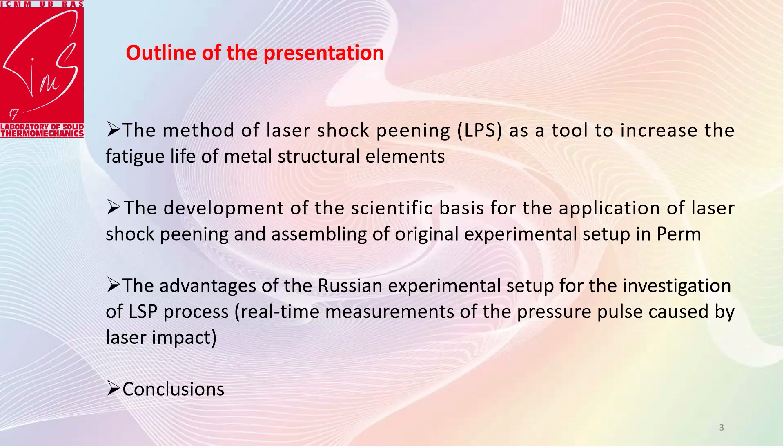Okay, the next slide is laser shock peening. I will show a movie. It's not our movie, but you can get an idea of what's going on. The idea is quite simple. You have a very strong and very short laser pulse. The power density is quite high, about 90 gigawatts per centimeter squared, and you immediately evaporate the material.

Due to evaporation, you generate a shock wave, an elastoplastic wave, a very specific shock wave with very high amplitude and very short duration. Short duration is quite important. The physical mechanisms behind the plastic deformation are quite unusual. This stress wave propagates in the sample, and you are able to create compressive residual stress at a depth of up to 1 to 2 millimeters.

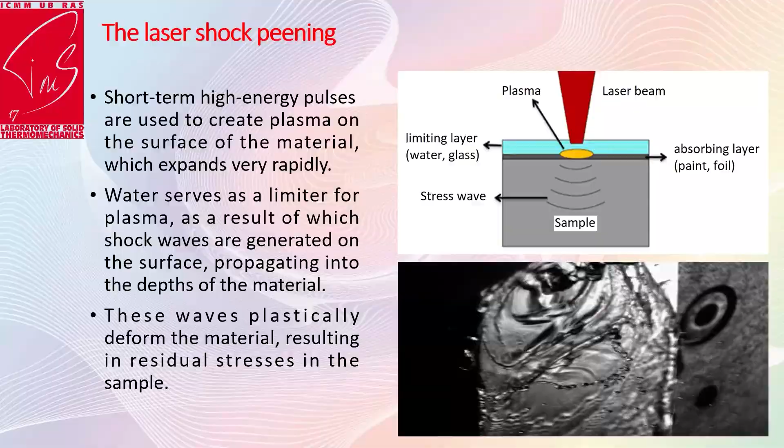The value of this stress is up to -1 gigapascal. So it's incredibly high residual stress, and practically you can stop cracks and initial defects, and as a consequence, you can increase the fatigue life. You can read the ideas of this technique and see what's going on. We have a water layer and a laser pulse, and after that, plastic deformation. So it's a very funny story.

About 3 years ago, I started to work in laser shock peening. I have very good friends in Germany. They developed this technique for Airbus, and they told me, you're working with fatigue cracks, there is a very good technique to drive the fatigue crack propagation, could you try? And he showed laser shock peening. It's a result from his colleagues from Germany.

You can see the standard samples. Blue square is the area of treatment, and red line is fatigue crack propagation in the initial case. And if you apply different regimes of laser shock peening, you can see the slowdown of fatigue crack propagation. Yeah, it's quite expected, and you have a technique to manage, to drive the fatigue crack propagation. And practically, if you have a crack, you can stop it, or you can prevent crack initiation.

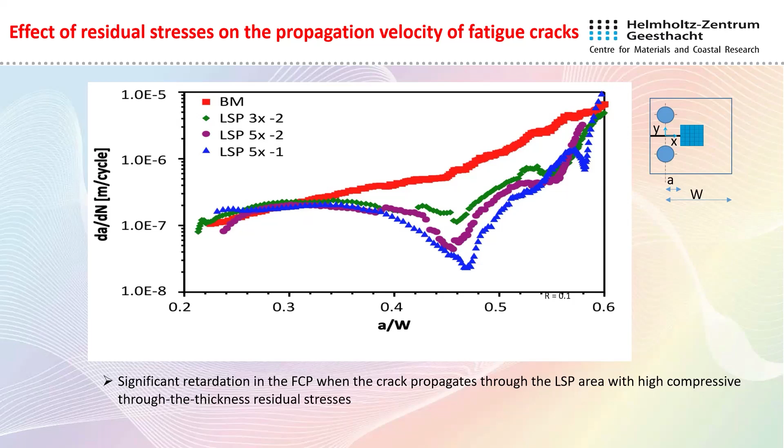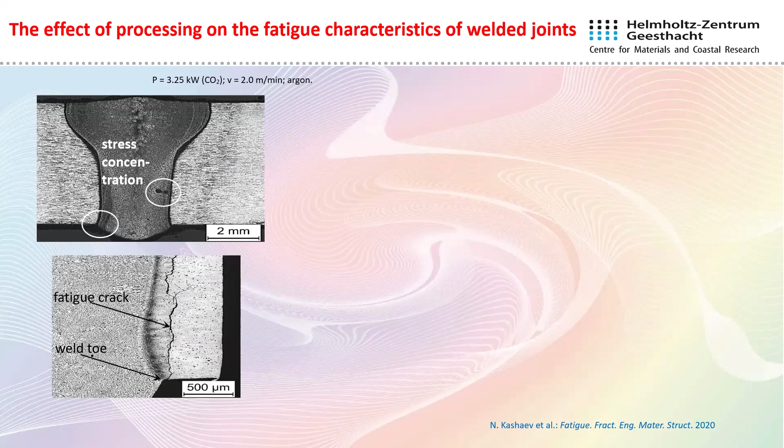Next slide was absolutely magic for me. When German colleagues showed me, it was absolutely fantastic. It's weld joints, and cracks with weld joints, and you can see the standard Wöhler curve for these samples. If you have a crack, of course, the fatigue life decreases. It's expected. But if you take samples with a crack and treat them, the fatigue life increases, and it's possible that a cracked sample becomes better than the initial sample. It's absolutely fantastic.

So after, I said, okay, we should develop this technique. There are at least 2 teams which work in the United States, even in Germany, and we cannot find this setup, this equipment in the Russian Federation. It was about 3 years ago. We started to work, and we developed. We're not going to buy this setup. We developed this setup in Russia using help of our Chinese colleagues. We bought the laser, robots and so on.

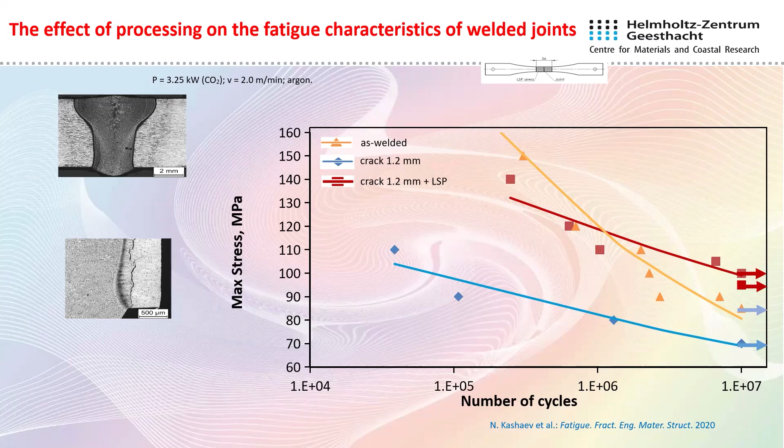And together with German colleagues, there was a collaboration agreement which was signed, I guess, in 2020. But in 2022, it was completely forbidden for German colleagues, even personal contacts with Russians. But in this case, we finished this setup and we started work, and it's really a pity, but we are waiting to start this collaboration again.

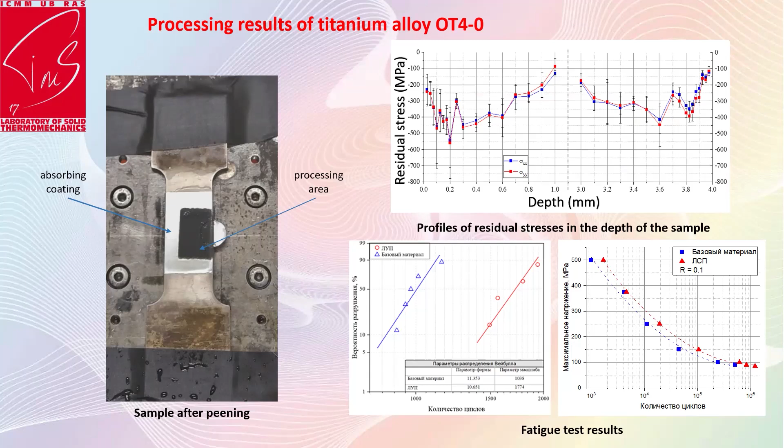So the preliminary result: we sent our colleague, Lena, to Germany, and it's quite simple experiments with titanium OT4-0. It's Russian titanium. I don't know exactly the equivalent alloy abroad, but you can see residual stress, 1 millimeter from each side, up to 500 megapascal, and it's good both for low cycle fatigue and for high cycle fatigue. And we decided to start this work in Russia.

Now we have an experimental setup. We can treat practically any shape of the samples, any materials. The power density in this setup is bigger than the setup of the United States. And if you are reading about this technique, it's really a magic wand. You can increase hardness, corrosion resistance, fatigue life, wear resistance, durability. You can heal fatigue cracks. You can do all what you want. It's absolutely fantastic, but it's not true, of course. Yeah, too good to be true, exactly.

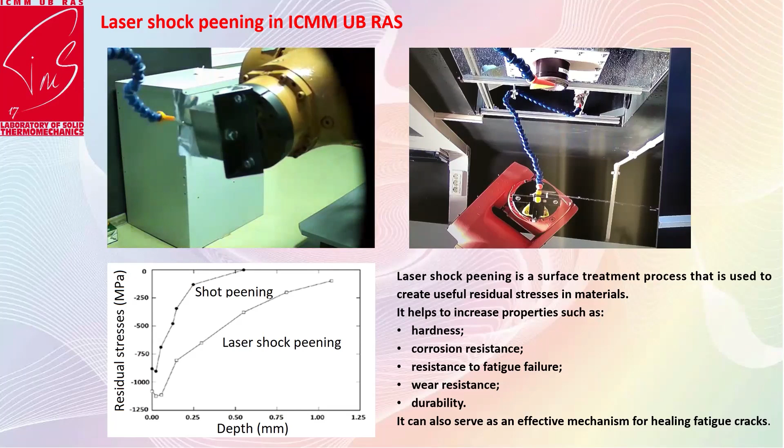But if you compare shot peening, the standard technique which was used in our industry, and laser shock peening, you can see easily it's bigger and deeper. But there is at least one problem. If you have such a technique, all in all, you have a balance. If you create compressive residual stress in one place, you create positive residual stress in another place. It could be inside of a sample, it could be on the sample surface. And it's really a big problem. And I have only a few minutes. I'll just show you what we are doing.

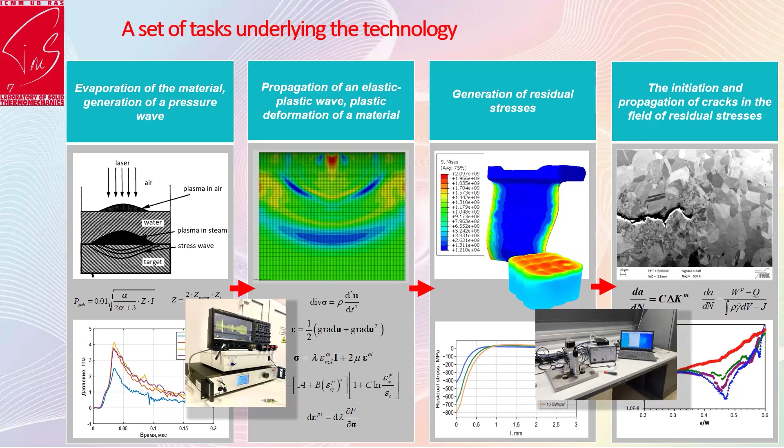Our advantage, we have 2 additional experimental setups in our lab. We have VISAR or photonic Doppler interferometry to measure the real pulse, and we can measure the residual stress. So I'm not going into detail, I'll just go to the final slide, and you can see the result. It's 3 kinds of samples, 3 different titanium alloys. For example, in this, you can increase the intensity two times. But what I want to show, if you find the good position of treatment, for example, this sample with stress concentrator, we have tested 5 different regimes of treatment. We can increase fatigue life 7-8 times.

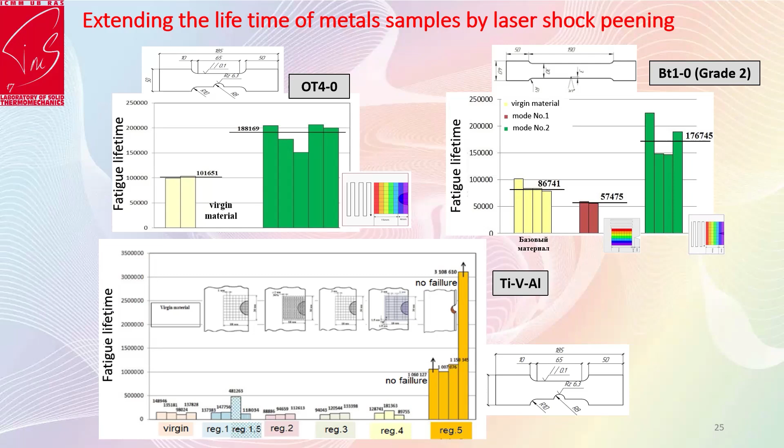So if you are able to simulate this process, and now we are able to simulate, if you're able to forecast the distribution of residual stress, you can find the optimal position, and you can easily treat real metallic samples, and results are quite promising. So, sorry, I have no time to go into detail. If you're interested, we're open for collaboration, and we have still a lot of open questions.